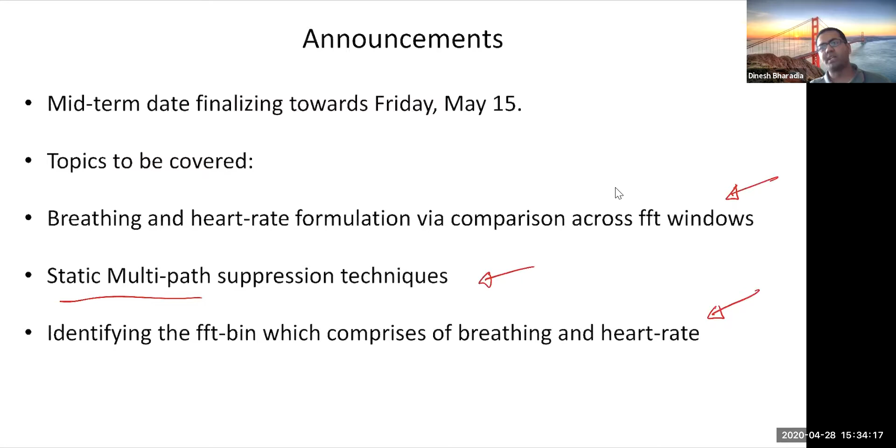I want to quickly summarize the topics we'll cover up to the midterm. This is the set of topics we want to have for sure for midterm. We'll have breathing and heart rate formulation via FFT windows. We'll show techniques to eliminate static multipath, and we'll build an idea of identifying which bin has a person versus which bin is just stationary multipath, or something changing much faster than breathing and heart rate, for example. So that's the gist of it - those topics would potentially be covered before your midterm. Dynamic multipath, we're not yet sure, just to give you context of what to expect.

So let's recap a little bit where we left off. Let's understand H of t - let me explain the architecture. You have a transmitter transmitting this FMCW waveform, x of t. That signal reflects back, comes to the receiver. You do a multiplication, mixing, then a high pass filter with a beta thresholding, where essentially you block all strong reflections with frequency less than beta, and we pass that through an ADC.

My apologies here - I don't know what happened. It should be H of t here. This is H of NTs, based on the sampling rate Fs. And then you can take FFT or some variant of FFT to understand a specific operation.

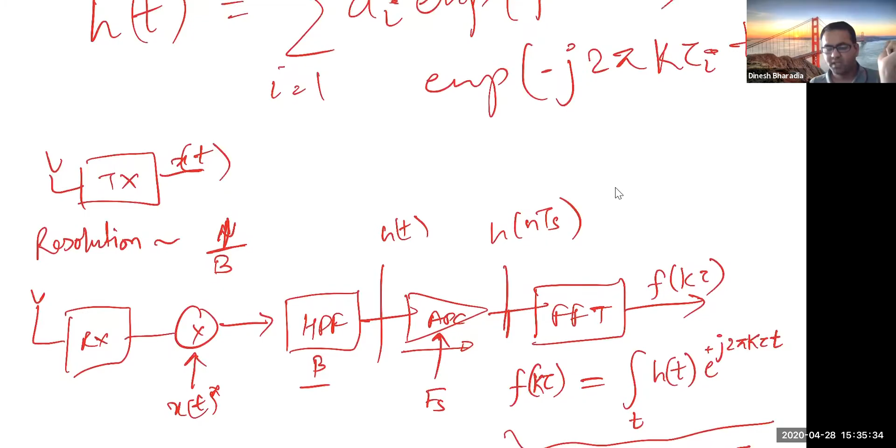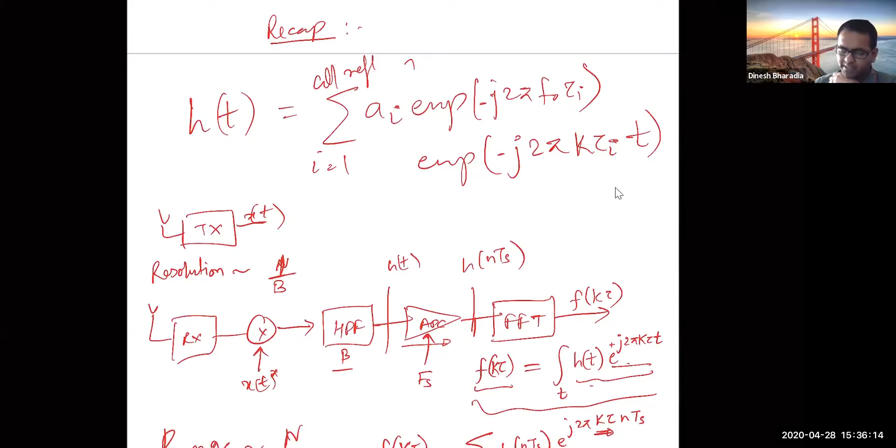Just to recap - if you take H of t times this formulation, K tau t, the expected outcome Fk tau can be written as... what can Fk tau be written as? Anyone want to take a guess first? If you do this integration of H of t - H of t is nothing but all these negative exponents. By doing this integration with a positive exponent, this positive exponent integration here, what you would end up having is this integration will lead to terms which are - anyone want to take a guess first, Keshav or anyone else?

So let's take an example. Let's plot this first quickly.

The idea is that once you take this kind of FFT, on the x-axis you have frequency of k tau, for the signals where it exists. You will get something that looks like this, with a sinc shape, a little bit like this, as we have discussed this sinc shape many times in the past.

So basically this is, let's say, a specific tau value for which a reflection falls back or comes back, and that's what you will get here. Now this f of k tau is nothing but, you can write it in some ways. Somebody want to try what this looks like?

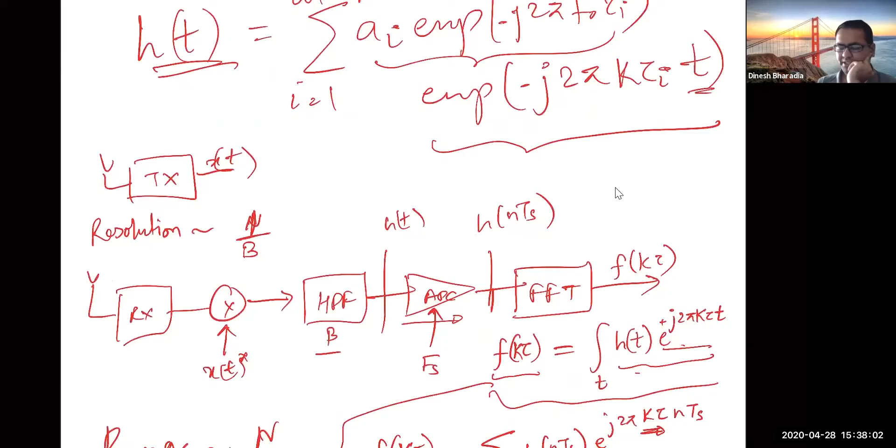So what happens to this exponent? This exponent goes away and gets replaced by a delta function or sinc function in this case. So you will get ai exponent of j2 pi f naught tau I, because it's a fixed phase component, not changing as a function of time. The only thing which is changing as a function of time will get balanced out by this integration here. Everyone following me here?

So Professor, ideally, I think I didn't follow that part. Okay, that's fine, that's a good idea. Thank you for asking that question.

So when you multiply this negative exponent here, Keshav, with the positive exponent, correct, what you will be left with is tau minus tau I, correct. Right, so whenever you do this integration, we can kind of write down this more specifically. Let me write down this integration more clearly, that way it's nicer.

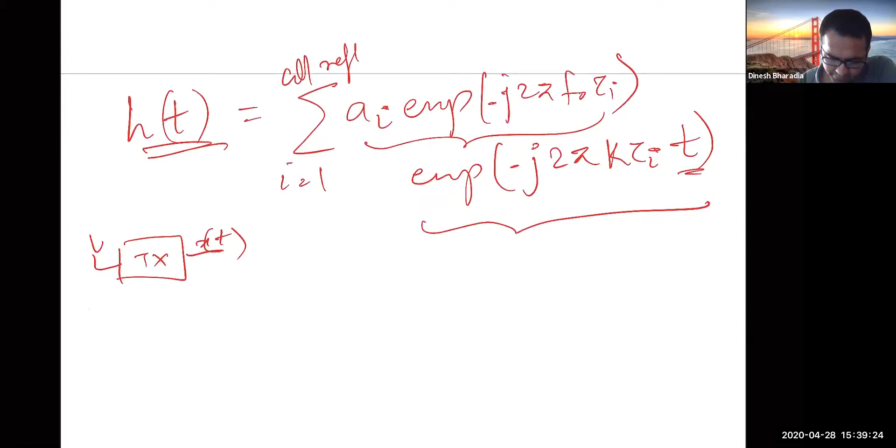Just a second. So if you think about it, this is what your h of t looks like, okay.

When you take h of t and do exponent of plus j2 pi k tau t, integration, what you essentially have is this component gets involved with this. So you have k tau minus tau I into t. I'm just substituting the h of t value into this expression here. And you will still have the ai exponent of minus j2 pi f naught tau I, but this is a constant term, so it goes out of the integration.

So what will this lead to if integrated from 0 to capital T? Let's say if it were integrated from minus infinity to plus infinity, what does this lead to? It's basically the exponential divided by 2 pi k tau minus tau I. So basically infinite integration of this leads to this one, if T were infinity, correct?

And let's say this 0 were minus infinity, in that case you will lead to this, multiplied with ai exponent of minus j2 pi f naught tau I, correct? But because we have finite time, this leads to ai exponent of minus j2 pi f naught tau I, sinc of k tau minus tau I.

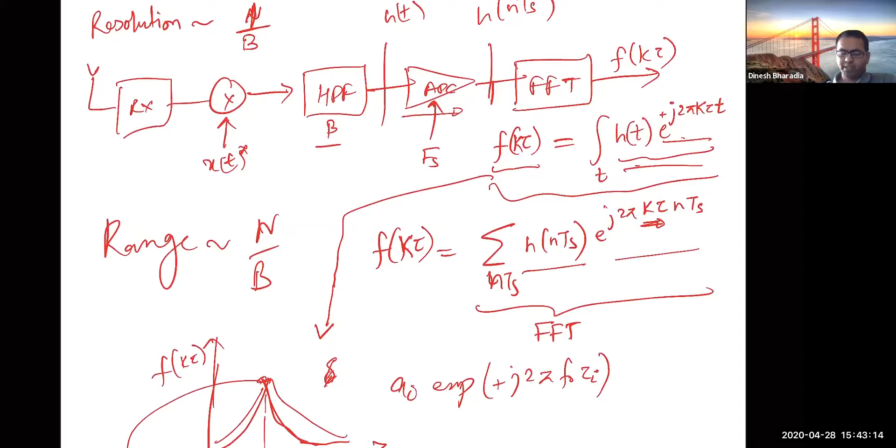So now, similarly, when you do the discrete version of this, the summation, you can first write down and start from h of nTs. So quickly, just to make sure we're following a little more rigorously here, h of nTs can be written as summation of ai exponent of j minus j2 pi f naught tau I, times exponent of minus j2 pi k tau I into nTs. You can do the same formulation and get to the same expressions which we got.

So finally what you will end up getting is something like if you take summation of h of nTs with exponent of positive j2 pi k tau nTs, this is your function f k tau, you'll end up with similar expressions as we discussed. You guys can evaluate this for yourself. But the insight really I want you to draw is the following.

This will also look like a sinc. And its amplitude, Keshav, with me on this? Yeah, I'm following. So the amplitude and all those properties will remain the same — it's just a sampled version of the same signal. The same thing will hold for this as well, and you guys can derive that.

So now let's go back to more intuitive, insightful things. So what we understood is that resolution, independent of sampling, is 1 over B for time. Correct, Keshav? Yeah. And so what it means really is that...

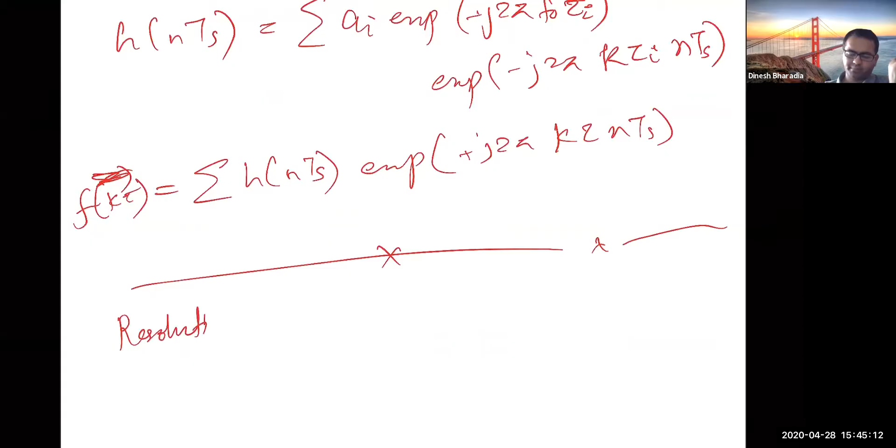Let's talk about resolution: of time is 1 over B. However, for distance, this resolution translates — it translates, Keshav, because it's 2d over c, which is proportional to 1 over B. It essentially means that distance has c over 2B as resolution.

So what resolution says is basically that if there are two reflections coming back at d1 and d2, when can we separate them? That's the question it's asking, or answering rather — separation, to be clear here.

How about range? Range, as we discussed last time — what is it proportional to, guys?

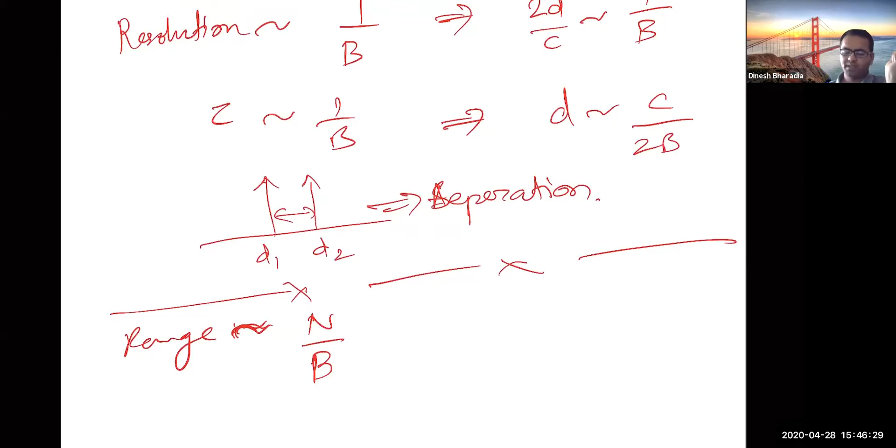N over B, right? How does this formulation come into play? The idea really here is that we take into account, as we understand, FMCW is a wave — it keeps increasing frequency over time. Let's say this is your T time, capital T. As you get more samples on this x-axis, what is your ADC doing? Your ADC is taking this received signal, which may consist of multiple signals here.

Before the ADC, you multiply this received signal with x star of T, and essentially you're trying to measure the shift. What we intuitively understood is that you essentially are trying to sample multiple wavelengths by sampling at different ADC points, correct? So as we sample at more and more points, we increase the range, as we've been discussing even with the multi-tone setup. So why does it increase the range? Let's understand that — anyone want to provide some insights?

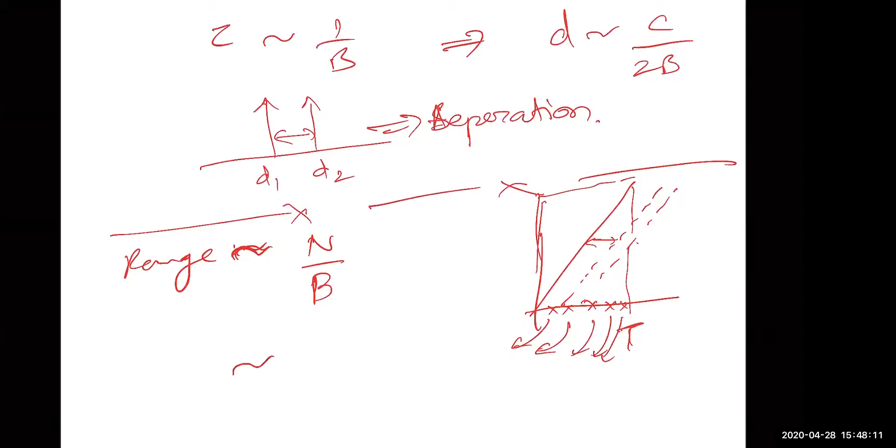Ideas, Keshav? How do we intuitively get to range? I think it's because it's related to B and then the time period we're sampling, so if you're sampling for longer, you should technically get a larger range. So you should get range equivalent to 1 over T, first of all. But again, it depends upon the number of points you sample.

Okay, so let's start with the resolution — our resolution in time is 1 over B. So one way to think about this is, I think the easy way to think about my resolution is this: how many samples do I get in each period? You can take this as T over Ts, because those are the number of samples you get in each time period — that's how much you can measure in length.

So I already know resolution, right? Which is, when can I separate these two when they can be in two different bins, okay? This is the closest distance two things can be, right? And how long can we measure? That's basically how many such separations I can create. So the way to think about it is T over TS times 1 over the resolution, right? The number of points, okay?

Does it help you guys in some ways, Keshav? Is it easy to think? Okay, how about Puneet? Is that the most intuitive way? I think, yeah, for me, it just boils down that FFT is the way to do it. Okay, but Puneet, go ahead.

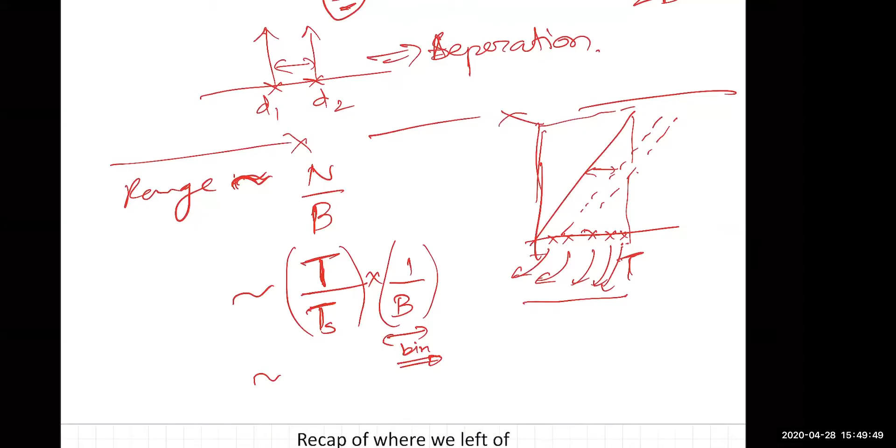Mostly, I think from the frequency bin perspective, the smaller frequency bins we have, the larger will be the range in time domain. That's about it. That is the bin, right? Bin size, basically. Yeah, right. And then basically the range is that number of bins times the range. Correct, right. So that's N over B.

Okay, right. And this leads to, now let's talk about distance, right? Distance is again 2D over C, right? N over B, right? So what it really means is that the range for D will be C over 2B times N, right? Okay. Basically, because it's two-way, the range has decreased to some extent if you think about it that way.

Okay, right. So I think briefly we understand this multi-wavelength intuition, right? Because we have been studying with one wavelength, two wavelength, and so on, right? Okay, so tell me, guys, following, right?

Does it matter in order to measure breathing and heart rate, the range and resolutions of the FMCW? Can you repeat your question, professor? Does it matter that in order to get breathing and heart rate for one person, right, these range and resolutions matter? So recall our first class, or first or second class, where we showed that even with one frequency, I can get you breathing and heart rate, right?

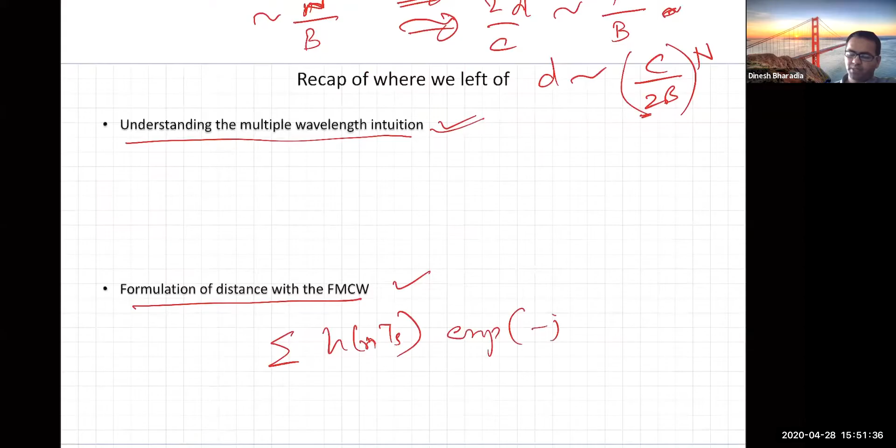Just that I need it to be super accurate, right? So what I'm trying to say is following, right? We understand this multiple wavelength, right? We understand formulation of distance, right? This is your summation of h of nts formulation, right, with exponent of plus j2 pi k tau nts, okay, right?

So I think the point I want to make is that third point here, beyond these two, is accuracy, okay, range resolution and accuracy. So even with one wavelength, you can get breathing and heart rate, okay, it just won't be robust enough. And we calculated in one of the classes that 1.5 gigahertz is the right frequency, okay, right, to capture both breathing and heart rate.

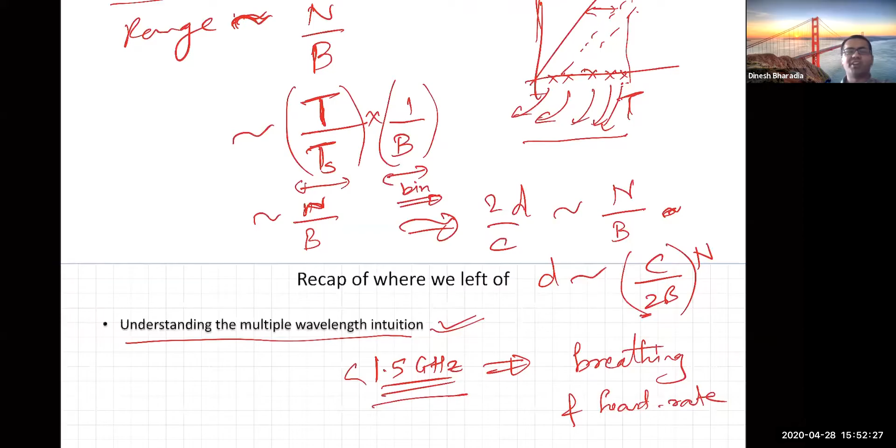That it will be done in one wave of this 1.5 gigahertz, right? Anything lower than this will be okay, right? Even above this, we said that we can make it work. We just need to do some continuity of phase, right? Okay, we'll come back and connect this dot, okay?

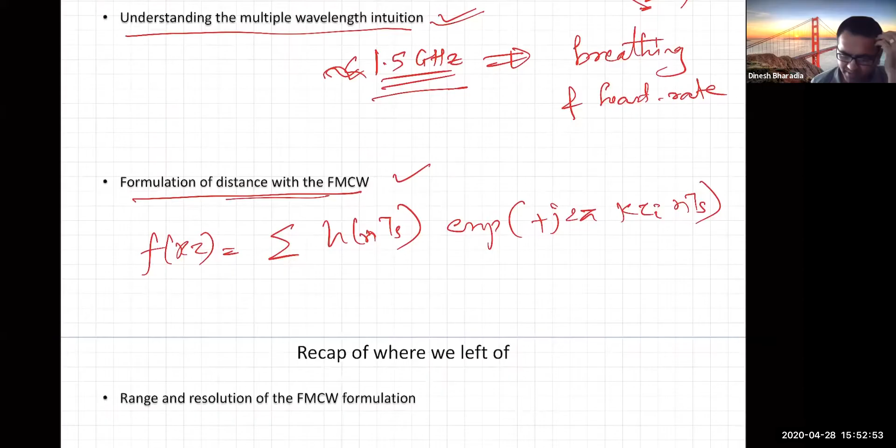So the point I'm trying to make is that these range and resolutions are good, right? But they are for a different reason. They are for making it robust, less to do with basically how you can even get breathing or heart rate, right? So that gives us the formulation of distance with FMCW. That's what we have discussed, right? And then we know range and resolution, right?

Okay, and now, finally, let me make one more point, right, which is the FFT based formulation, right, which is essentially like this formulation, right? Okay, so is this FFT first of all?

Keshav? It looks like it, right. It's actually, let's call it DTFT rather. It's DTFT, not FFT, okay. And we know because this tau version is continuous, okay, right. So that's why it's DTFT, not FFT. Okay, right, discrete time Fourier transform. And it's, you can call it inverse, but it's Fourier transform, right?

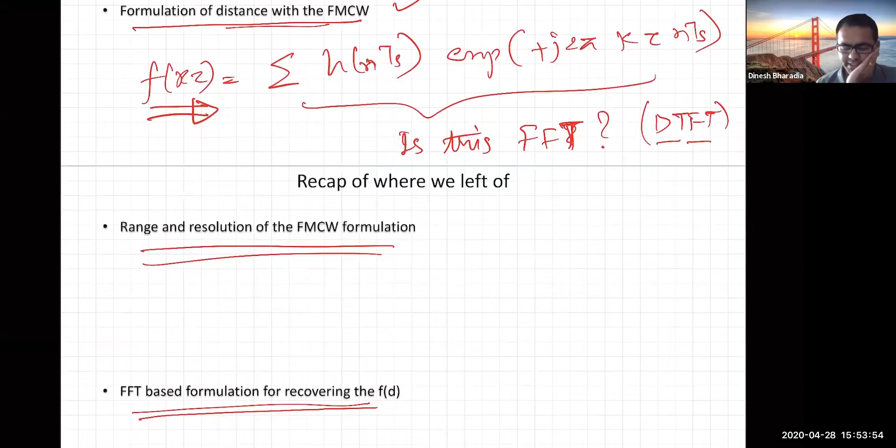Okay, so the problem with DTFT will be the following. You will measure f at k tau at some discrete points, let's say k, tau k's, okay, right? Does that make sense? Are the two Ks the same? Which case? Sorry, oh, my bad. No, my bad, let me use a different notation. Sorry, yeah, thank you for making me aware of this.

Tau m, okay, right. Now, can you tell me where this tau m goes from 0 to what value? Meanwhile, I'll complete the expression here. How about Puneet? How about you tell us what tau m goes from where to where?

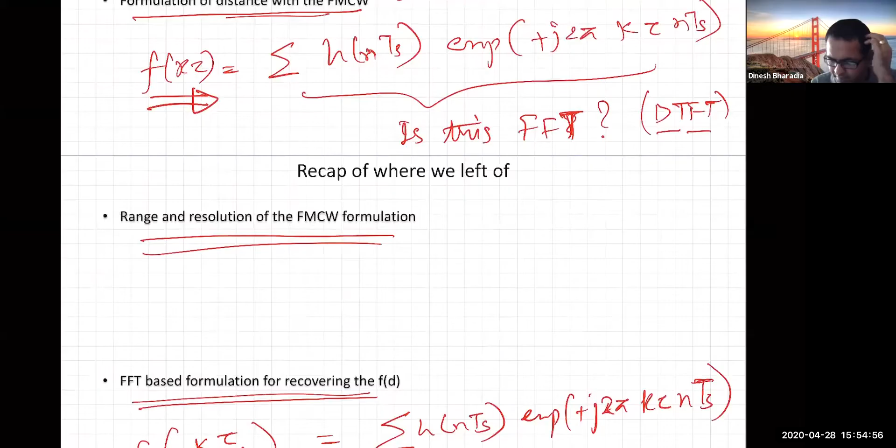Now is 2D over C? No, sorry, that doesn't make sense. It's nothing to do with 2D over C. Tau m, I'm asking where does this tau m go from, what points?

So it's essentially like taking DTFT and evaluating at a fixed number of points, right? That's FFT. FFT is like DTFT evaluated at some fixed frequencies. Call them FM here. So similarly, this FM is the frequency here if you think about it.

Let me write this down as tau m, subscript m, okay? Everyone follow?

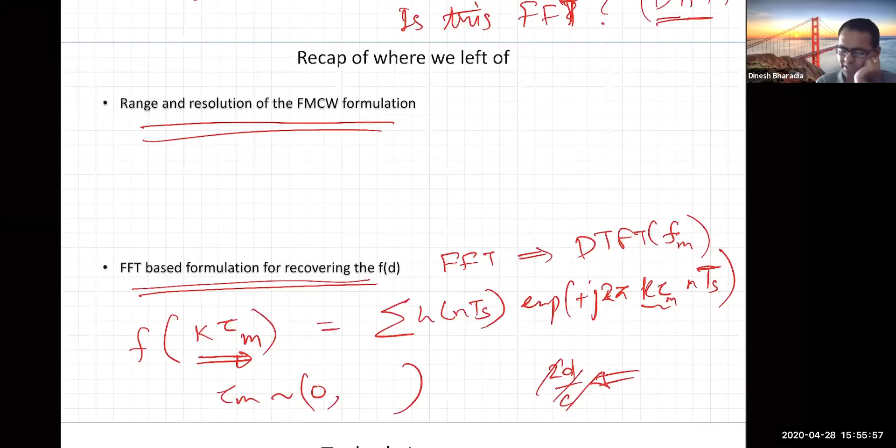Keshav, what will be the maximum value of tau m? Can anyone tell me here? Would it be T, the time period? No.

What is resolution and what is range? So what is range, Keshav? N over B, right? That is what it will be. Does this make sense to everyone?

What will be the separation between two tau m values? Puneet? 1 over B. Yep, does it make sense now, guys? Keshav, so between two bins of tau, let's say tau 1 and tau 2, the separation will be 1 over B, or not C over 2B rather, or 1 over B rather, because it's tau.

Okay, everyone with me? Yes, okay. So this generally builds the construct for you on how to think about this DTFT within discrete time with FFTs.

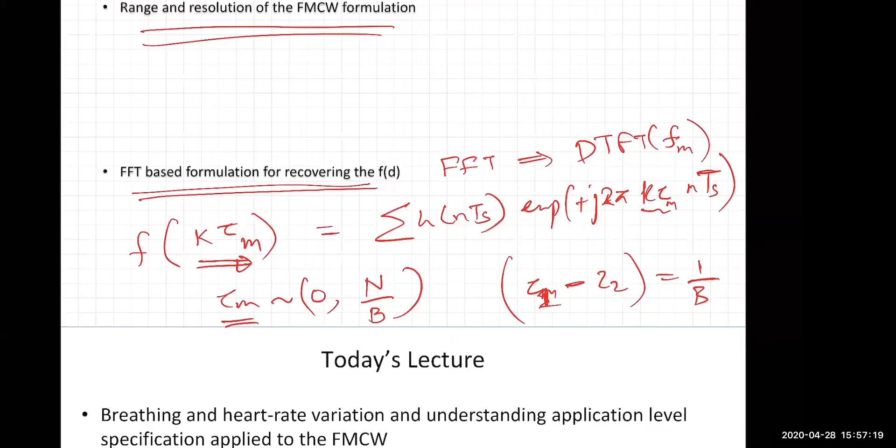So now I think what we'll do is we'll use this transform today and essentially learn how to get breathing and heart rate. And like start from the application layer again. And this is not just limited to breathing and heart rate.

You can, sorry Keshav, you had asked about T. What is T? Oh, this is for an older message or is this just now? Oh, this was me trying to answer that question. Okay, okay, yeah, good. Yeah, sorry, I was not noticing the chat so far.

Sorry, let's continue. So basically breathing and heart rate variation, right? Understanding application level specification and then boiling down to the FMCW parameters, waveform parameters, and using them to identify breathing and heart rate. And finally, one of the most important things with FMCW, which is quite overlooked, is looking at the phase information. And then I will finally connect back with some of the first few lectures we kind of have been looking at how to go about them.

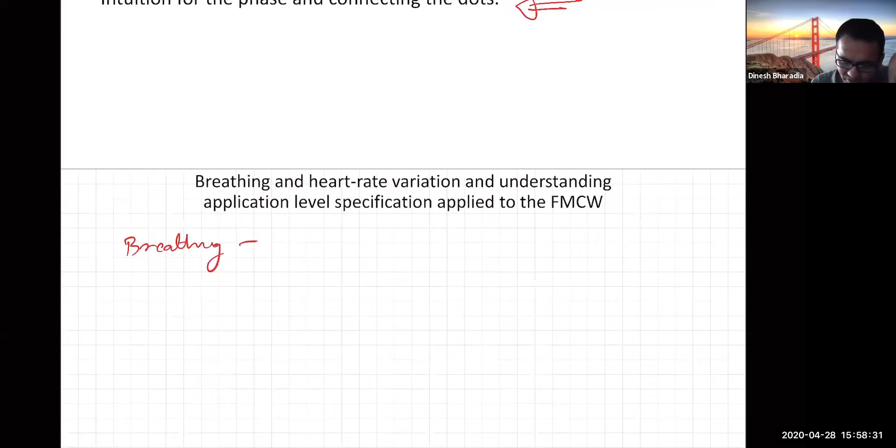So let's understand breathing and heart rate. Breathing signal, so far we have been assuming that it will be like 10 centimeters, again this is peak to peak. Is that what we have been using? Okay, and for heart rate we have been using 1 mm, correct?

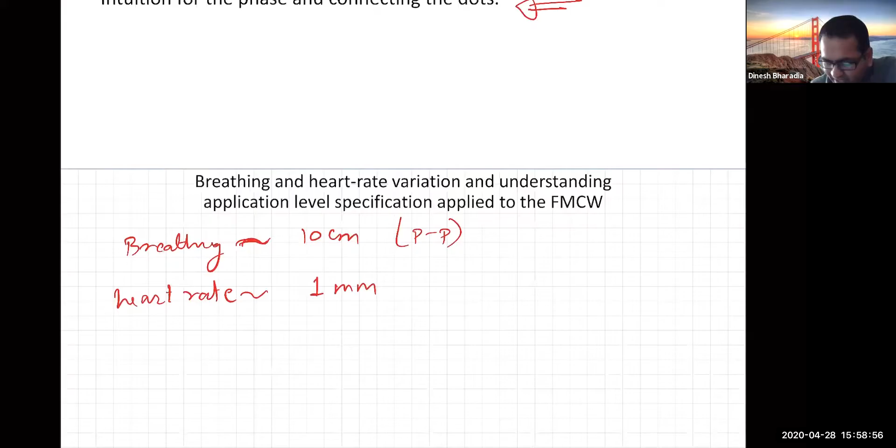I need to check these parameters, but okay, assuming that this is the parameter and the spec we are trying to design this for. So more than that, right?

What is interesting with breathing is that breathing changes with time, with what frequency? Keshav? I think it was around 0.2 to 0.4. Yeah, 0.2 hertz. Let's take 12 breaths per minute, BPM. And for heart rate it is 0.6, 0.6, yep, somewhere between 1.5.

Or let's take, what is a standard popular example you guys keep using? Come on folks, it's 0.6. Yes, what is the breaths per minute? Let's take 60 breathing per minute, okay, or beats per minute. We'll make it 1 hertz for now. I think let's keep to that example, okay.

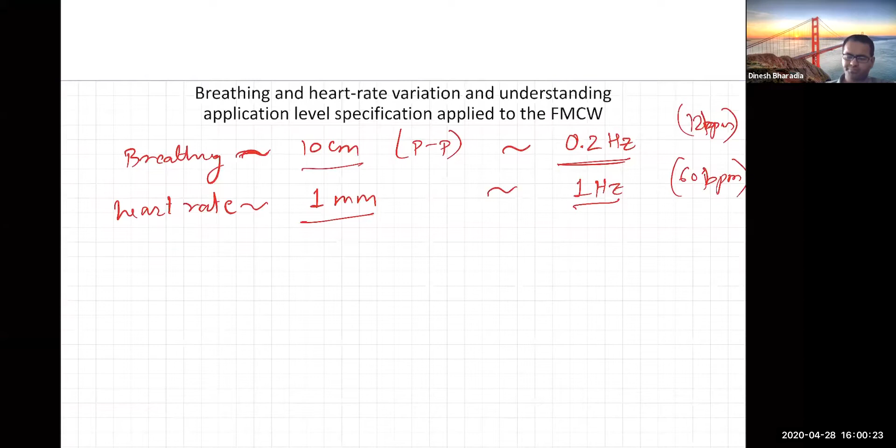So with FMCW, right? Now these are our specifications. What does this translate to? What it translates to is that D is changing with 1 hertz.

We need to at least, let's call it try to measure, the sampling rate should be at least how many samples, guys, to measure heart rate accurately for 2 hertz, right? So what I'm saying is that let's say D of T, which is your D0, plus DH times sine of this.

dB times sine of this and dH times sine of FB, FH - the frequency of breathing and frequency of heart rate, correct? So this D needs to be measured at least at 2 hertz rate, correct?

Now, with your previous way of doing FMCW, what is your sampling rate? How often do you get a D? This is one of the questions somebody also has asked on Piazza, right?

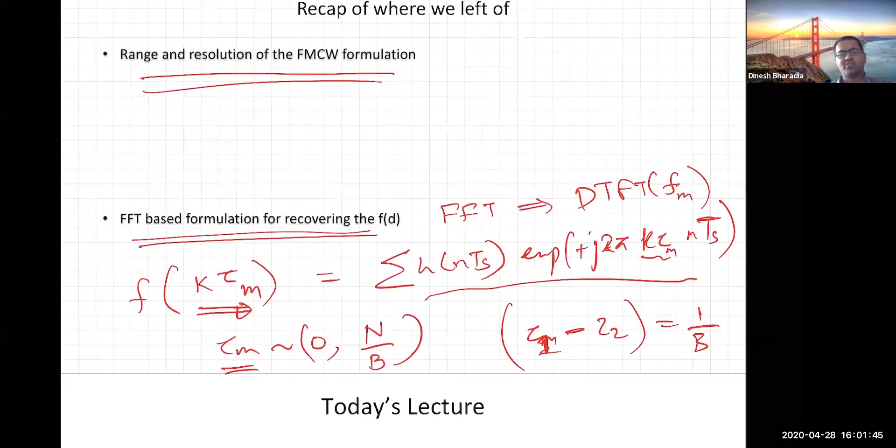So in a way, when we take this FFT, we assume for this small period of time, from the time of 0 to capital T, the environment is stationary, correct? Everyone with me on this? Yes.

Thank you, Puneet. So now, what is the rate at which we are getting samples for D? Keshav. Is it T? So you get one sample for every T seconds, right? Every T time, yeah, you get one sample.

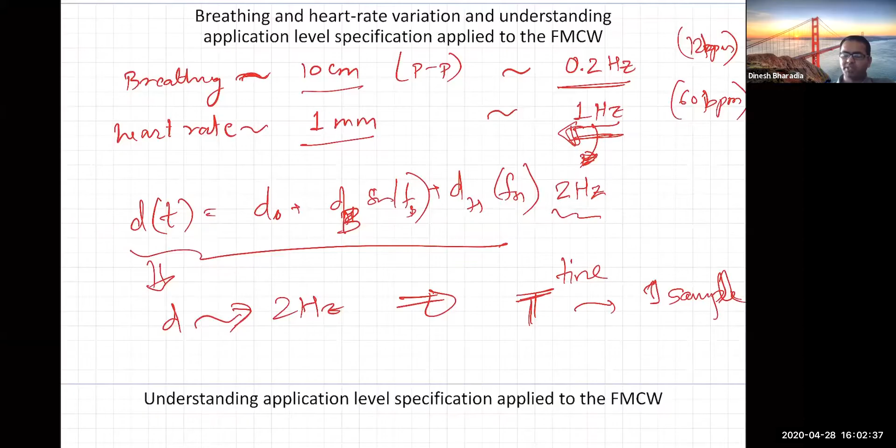And what I mean by one sample is that essentially you get one measurement of D, correct? So think of this from the following point of view. You're calculating this f of k tau - that's essentially for this entire period of 0 to capital T. I'm giving you the output of the FFT, which will look like this - giving you one strong component at this distance.

Let me write this down. So let's take an example: from 0 to capital T time, you got one f of k tau, correct. Let me just draw this as a third dimension here. For next time, from T to 2T, correct?

Let me write T here. From T to 2T, you have another similar function, which measures the distance. So each snapshot gives you a measurement of d. It's the same as your two-stage process.

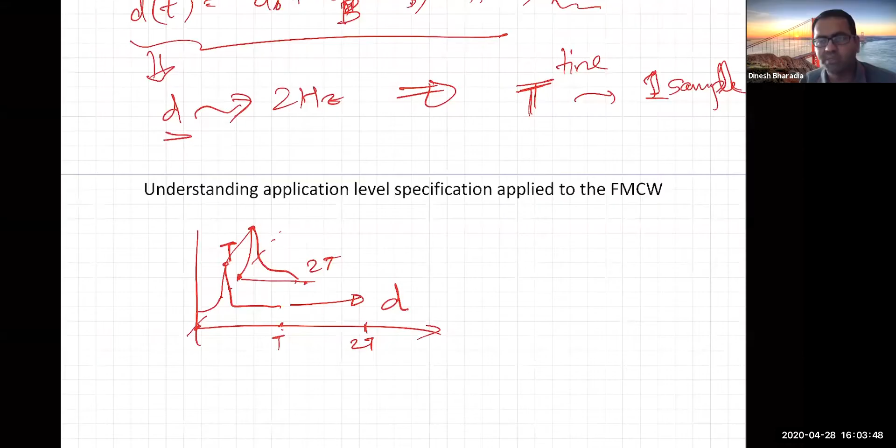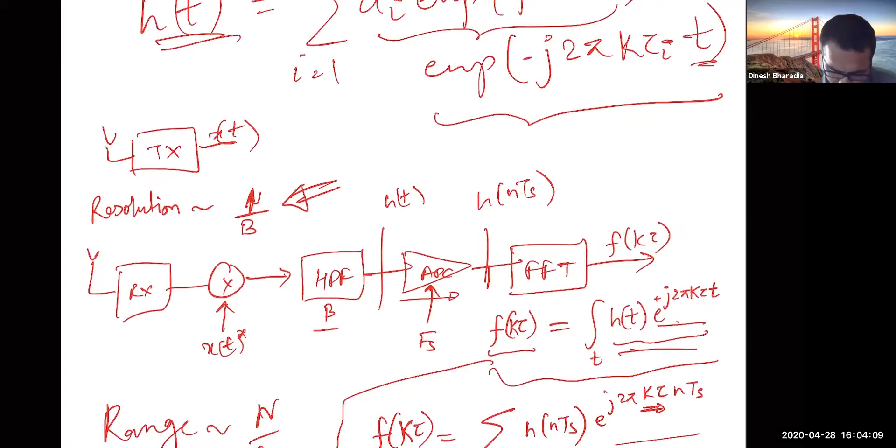So just to iterate and connect the dots back with the original thing, take a look at this architecture we have drawn earlier on. Let me just pull that architecture up quickly here and copy it over. Is it still visible?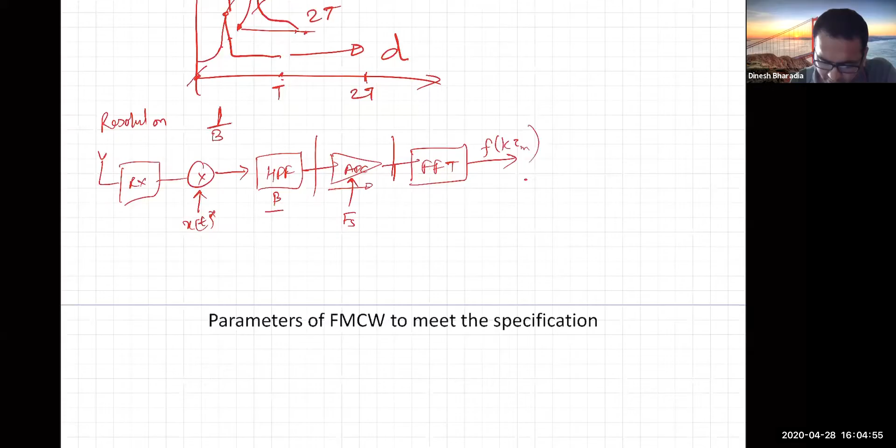I'm not going to write the mathematical expressions here, but just to give you a sense - so here you calculate f of k. What do you calculate? K tau m, right? Think of this block here as...

Professor, I have a quick question. Go ahead. So in the formulation of the summation earlier, we noted that tau m goes from 0 to n over b. But in the summation you wrote, it goes from 0 to t. Was that correct? It's still correct.

Let me explain. I think it's a matter of, in this case, n times ts needs to start from 0 and it goes all the way up to T. What is T? When you take it, it's equal to capital N, correct? T over TS is nothing but capital N. So you can say this summation goes from 0 to N, for example. Is that the question?

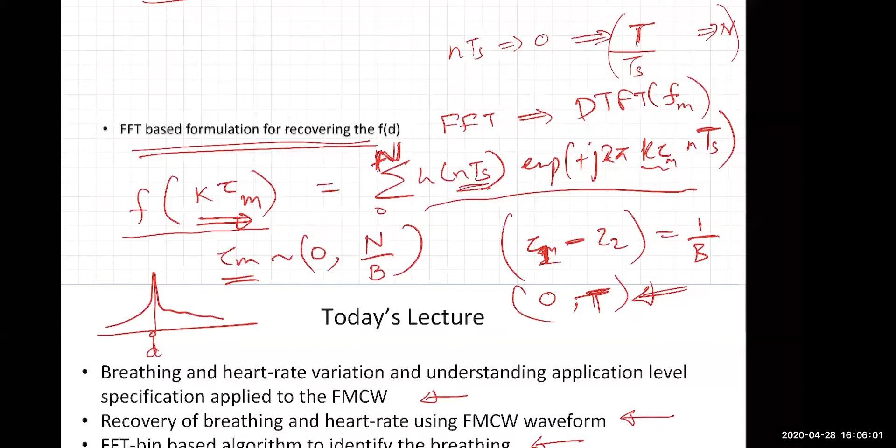I'm still a little bit confused as to why it goes - confused with the expression. Let me... why don't you tell me the same expression that we were talking about just now. So aren't we summing over all tau m?

No, we are summing over - oh sorry, that's a good question, thank you for asking this. We are summing over n here, guys. If everyone is not clear, look - it's the time index on which we are summing or integrating. Think of this: this is your equivalent of time index, T equals to N times TS. It's summed over time, guys, not summed over n comma t - depending upon the notation.

For example, for this integration here we talked about in the continuous time - it's summed here for what, Keshav? T, from 0 to capital T. The same thing in digital domain basically becomes this summation here, for example, goes for some n equals 0 to capital N.

Does that make sense now? Yeah, that makes sense now. Thank you for asking these questions. I think these are good questions, keep asking them whenever you feel like it's not clear.

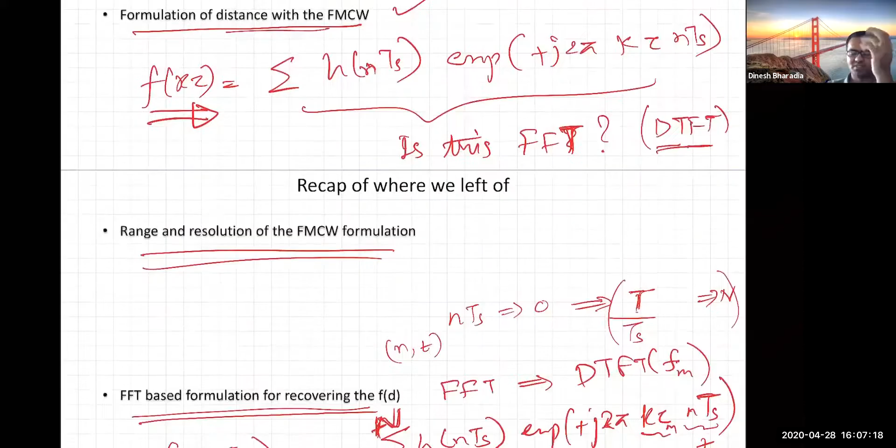So now you understand this three-dimensional notation, right Keshav, and everyone else here? I have a doubt - similar to multitone, when we take one time period, we'll get a sinc function, find the dominant path, and do it for multiple time instances. But I see the resolution for distances will be pretty bad, because I calculated for 1.5 gigahertz it will be 1 by B, right, so it will come around in meters. So we will not see a change across time in the distance variation - it will be the same bin where we'll see the peak always.

That's a good point. In the 1.5 gigahertz case, definitely that's true, and that's not the way to analyze it. This is where you need to step away from resolution - as I made the point earlier, to measure breathing and heart rate you don't need any range or resolution. You only need accuracy, because you can track the phase as it changes.

So for example, here as well - what is the phase here, by the way? The phase is proportional to A tau, right? What is A tau? Exponent of J 2 pi F naught tau i.

So what I'm trying to say, Puneet, is the following: the peak won't change, but its phase will change, for your one tone. In this case, for breathing, the peak will change, and for heart rate, the peak won't change. We'll go over this slowly in today's class and hopefully that will clarify it for you.

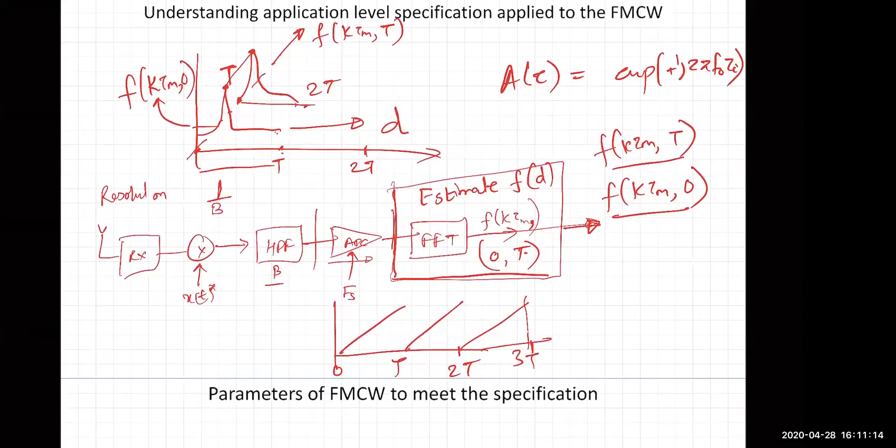The second stage of the process is to take - we do the estimate for multiple chirps. I think we've already explained that f of k tau m comma T is one for each chirp, right? Yes, you're correct, we'll now analyze it for multiple chirps.

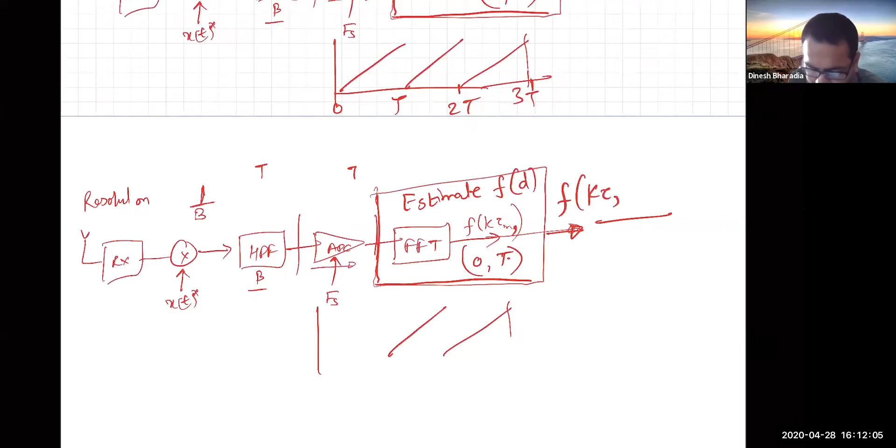So just to clear and complete this thought process, I'm going to copy this. So now this f of k tau - how can I write this now? Let me write some notation: f of k tau, comma, capital N times t, okay, or let me write it as m - no, m I already used. Let's call it L, we can use L - Doppler is L for me always. So it's L times capital T, correct? This is fed into the second part of the process.

And this second part of the process, by the way, guys, right? So this is essentially generating one for each chirp. F k tau LT is like for one chirp each, or let's call it the Lth chirp. Does everyone understand by chirp, I mean this FMCW transmission and the entire process of FFT, okay?

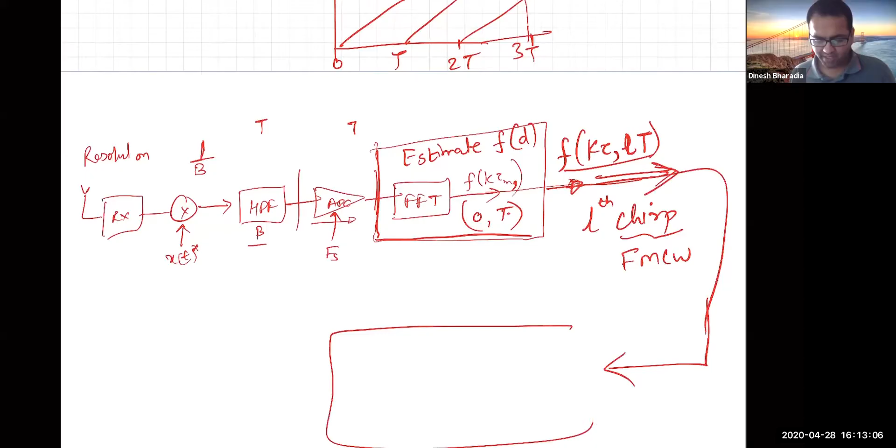So this signal then is fed into, what is it fed into? Measure breathing and heart rate here, okay. Or what we call here is more like analyze time series, like we have been calling this previously.

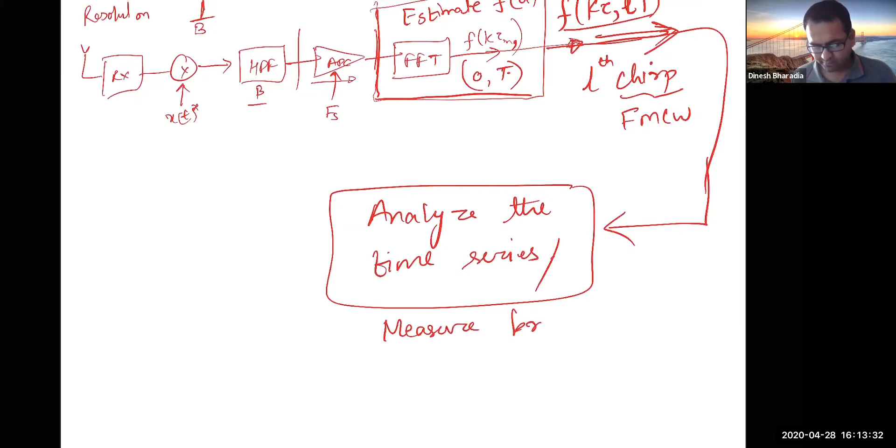Now, is this clear, the process, right? At a high level, the process is clear. Now, how do we go about this process is a more important and interesting question, right? Puneet, make sense? Yeah. Keshav?

Yeah, okay. So one trick will be like, as we discussed, we'll just monitor what happens. Let me just explain here, let me highlight. Let's see, for example, I analyze. Can you see the highlight here? I guess yellow color is not visible, or let's do orange. Okay, so we'll essentially use these times and their peaks and see the peak shift, for example.

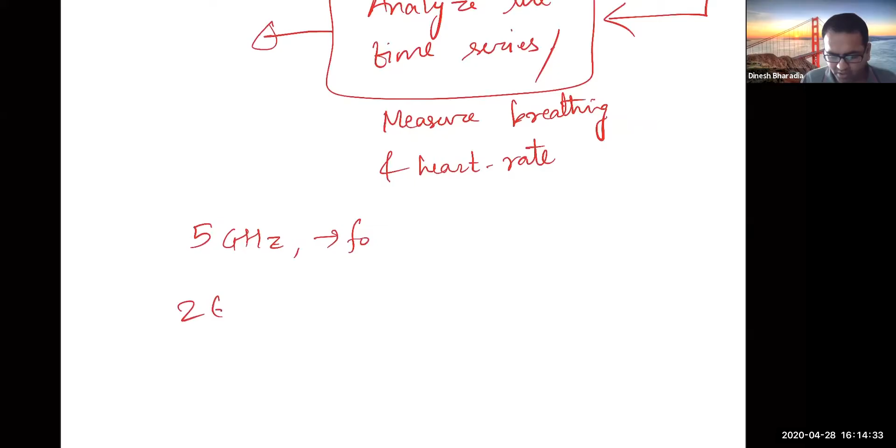So let's take an example from our previous parameters. In the last class, we defined a radar which had 5 gigahertz as F naught, 2 gigahertz of B. I don't think we need anything other than this. And this will give us resolution of D, which is C over 2B, which essentially comes down to 7.5 centimeters, correct?

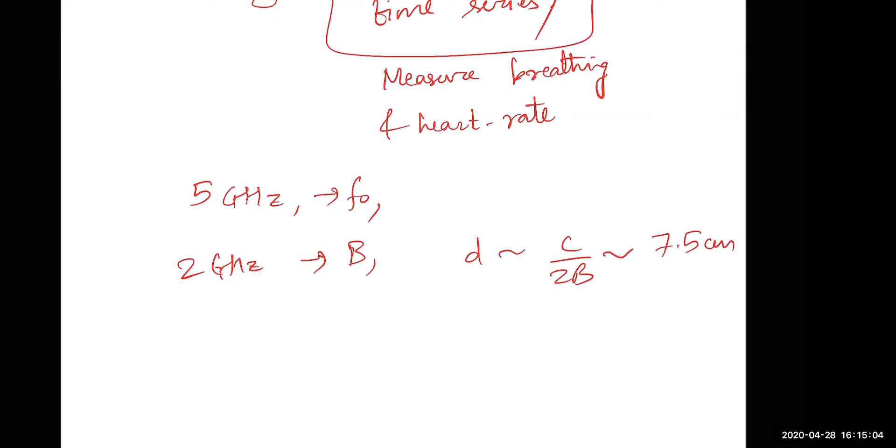Professor, aren't you multiplying that by n? No, this is resolution, what do you mean by resolution? Oh, resolution? Sorry, yeah. So, and what was capital T in last class? I think we took it as 100 nanosecond or something like that.

So now think about what is the sampling rate at this point, guys. The sampling rate at this point is T, right? You get one sample every time T. Correct, Keshav? Yeah. So in a time series, if I get one sample at time T, every next sample comes after time T.

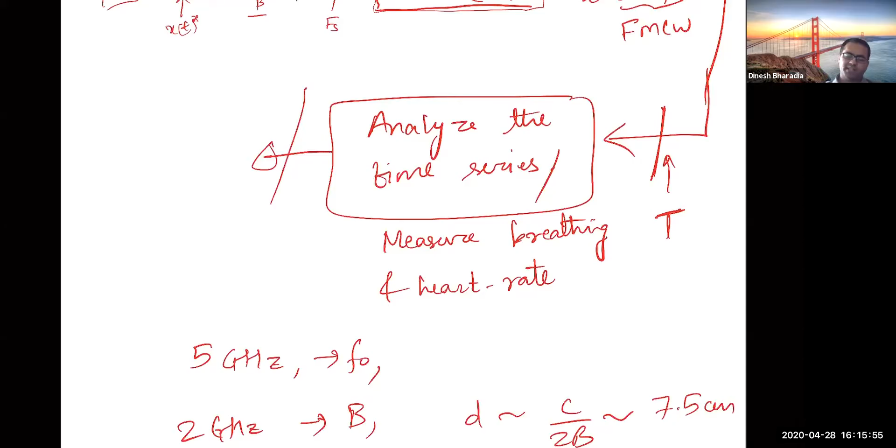So let's start from this part. What is the process we are trying to measure? We are trying to measure 1 hertz heart rate here, with amplitude of 1 mm, and 10 centimeter with 0.2 hertz breathing rate. What are the implications of these two processes on this side?

So let's start with the frequency implication. The frequency implication is that this T should be at least 2 hertz. Okay, let's say more like it's because it's time. Let me erase this a little bit. Let me call it 1 over T should be greater than 2 hertz. Does that make sense, Keshav?

Yeah. Now, similarly, this 1 mm and 10 centimeter, how can we derive some insights from this? So let's understand what is the bin width here, meaning when I take f of k tau m, how much is each bin separated from the other bin?

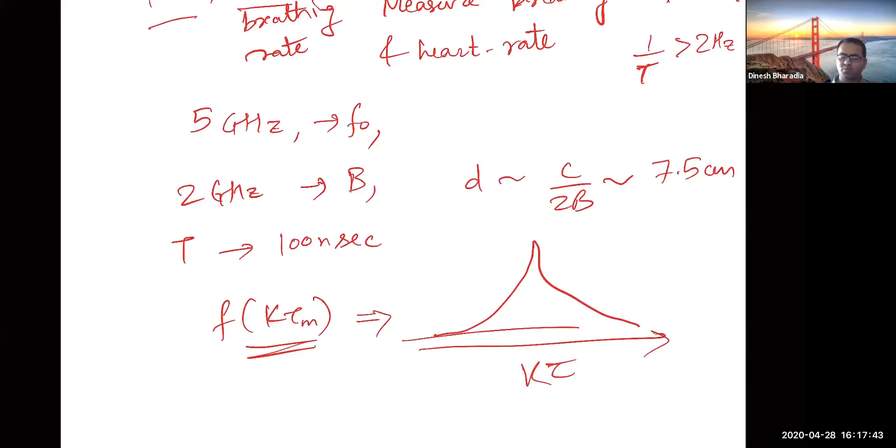So basically, when you do f of k tau m, it will be like a bunch of these discrete signals with x-axis as tau, k tau. And let me just draw maybe more like a sinc function. Yeah, it doesn't look like sinc, but it is sinc, let's say. Let me redraw, let's say this is your sinc. I get one sample here, one sample here, different k tau m's, right? Does that make sense, Keshav?

Yeah. So now, basically, with breathing, because this bin width is 7.5 centimeters, what would happen really here is that when you try to process this data, let's take an example that this is your f of k tau m at time instance 0. Let's say you see a peak here at this bin, and let's say it's the highest peak. In the next time instance, you'll see the same peak here somewhere. But at some point, let's see what is that point. So let's say your breathing is 0.2 hertz, what it means is that this is your D axis as well. So because breathing is changing slowly, you'll see some kind of a sinusoid pattern here.

Does that make sense? Between this D? Yeah, it's because you have different chirps, right? Yes. At different chirps, your D will change slowly, right?

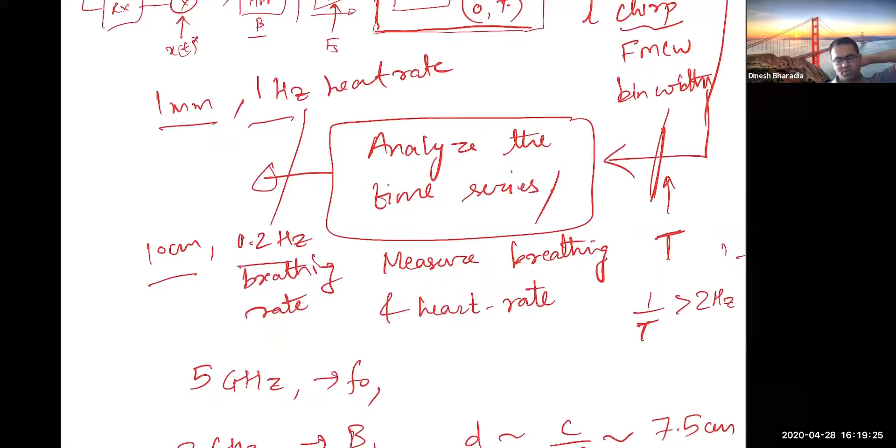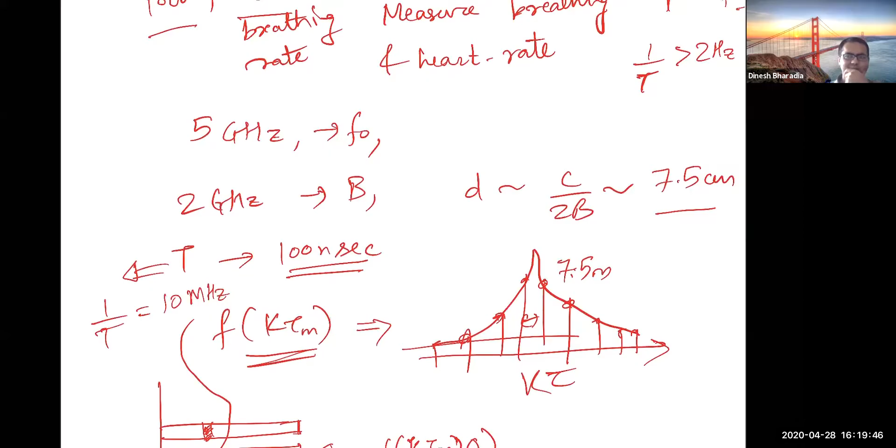Okay, but just to give you a sense, right? Because we are doing every capital T as 100 nanoseconds, right? So you're getting how many samples? What is your sampling rate here? 1 over T will become more like 10 megahertz. Correct, which is a whole lot more. But the idea really is that this distance D will change after 10 million samples, right?

Okay, is everyone following me here? Yes. Professor, but that distance bin of 7.5 centimeters, isn't that a little bit too large for...

I think this is for heartbeat. No, 7.5 meter... sorry, breathing, right? Let me just quickly correct a few things on the slide. This is centimeters. Sorry, for breathing we need 10 centimeters, right? So you guys understand that we can get breathing, right? But we don't know how to get heart rate now.

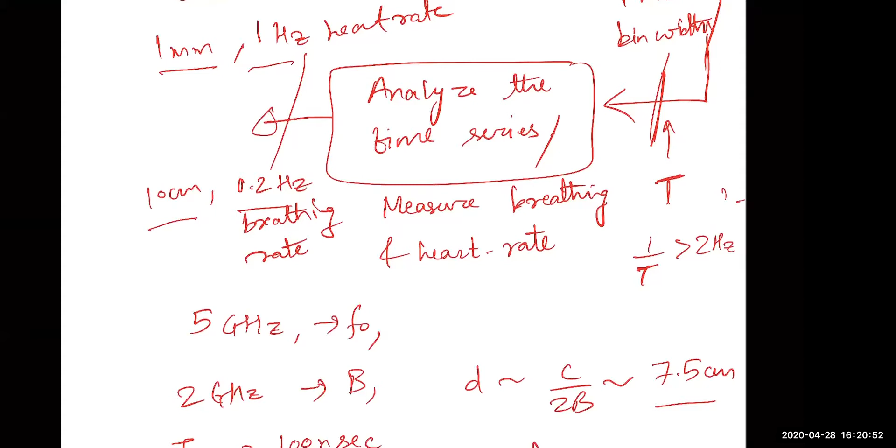That was my question - isn't that too large for heart rate binning? Yes, for heart rate you cannot separate the bins, right? Does that make sense to Puneet as well? Yes.

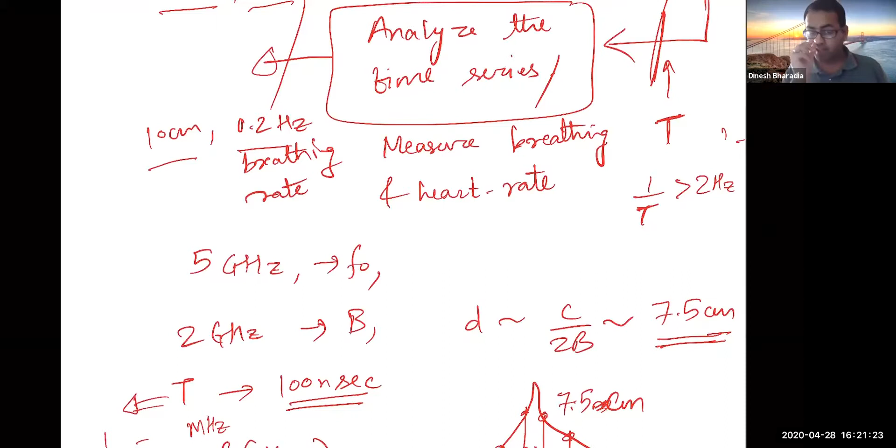I mean, is this still too large for breathing? Which plot? I mean 7.5 centimeters. Yes yes yes, just changing between two bins, or three bins at most. Yes, exactly, so even for breathing there are not many levels. Is that what you're saying, Renji? Yeah, so even for breathing you don't have that many levels as such.

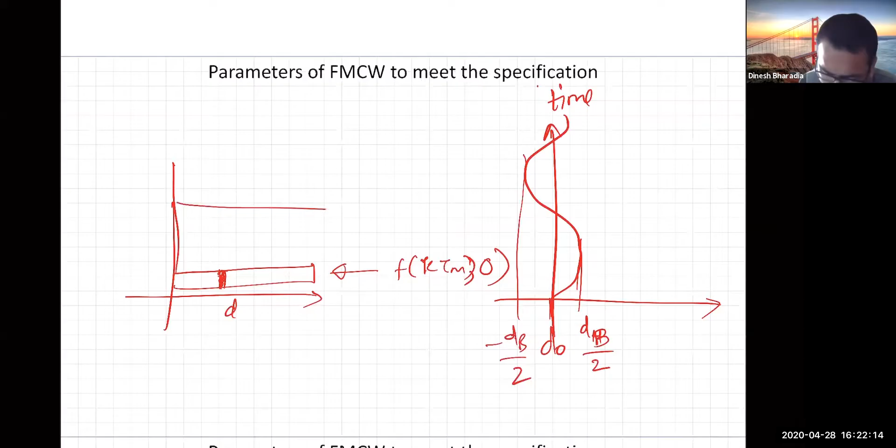Okay, let me erase this a little bit, and let's draw distance first, here on the right side. I'm going to draw distance here, let me explain. On the y-axis I have time here, and breathing changes here. So this is your D naught. Let's call this D breathing by 2, and this is D minus breathing by 2. Let's say this time here is 2.5 seconds, just because breathing is 0.2 hertz, let's say.

So what would happen really, guys, is the following. In this entire 2.5 seconds, when you look at this f of tau here, it will maybe shift by one bin. Not even one bin - but let's say that's basically the maximum shift you will see. Does that make sense?

Yes. Sorry, I kind of have turned up the zoom weirdly. I don't think you guys can see it. Okay, yeah, sorry.

Yeah, next, I think when you go back to this 5-second time point here, right, then this maybe will go back to the original bin. So you'll barely see a fluctuation between like 2 bins. So how do you measure with just small fluctuation between these 2 bins? Does that make sense, Ranji, Keshav?

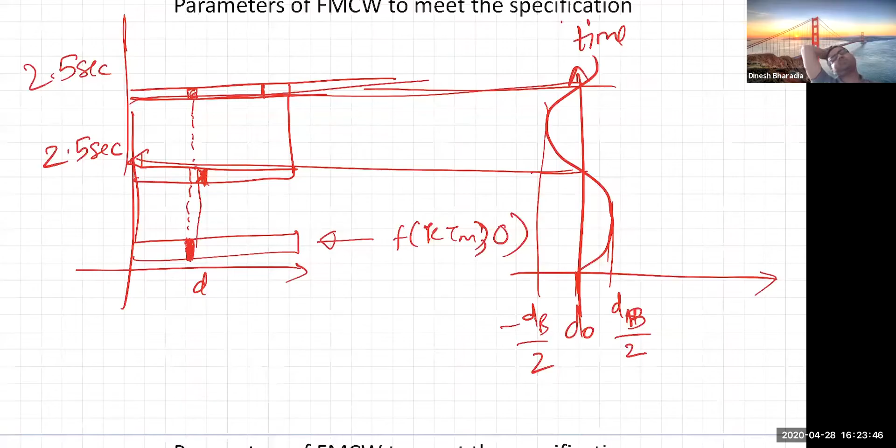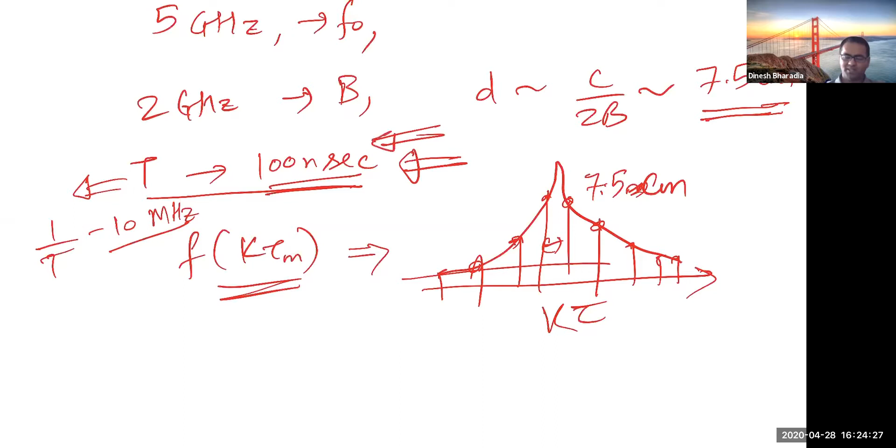Yeah. How about you guys give me a crude algorithm? So now we understand the overall problem statement. Let me summarize a few things. Capital T - here we have, this is more than sufficient, this is like your 10 megahertz. What you really need is just something as slow as a few hertz - or more specifically, 2 hertz is sufficient, 2 to 3 hertz is sufficient. That's number one. So this is a super over-specified parameter, but bandwidth is super under-specified.

Correct? Or it looks like it is super under-specified. Sorry guys, I think I just got a warning that my laptop is running out of battery. Give me a second, I'll get my charger.

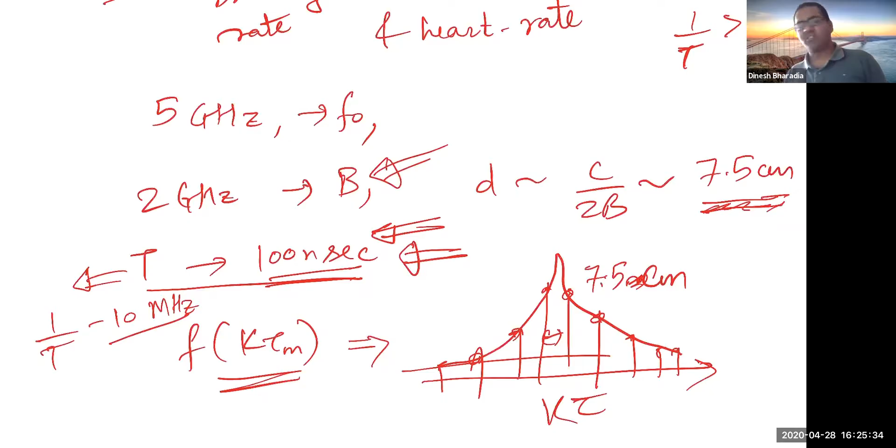Sorry, yeah. So bandwidth is very little because it gives you 7.5 centimeter resolution. Would have loved to have some millimeter resolution. Now I think what I'm going to show you today is that these parameters, which may look insufficient, are actually sufficient - that's the objective function I have next. So we understand that the FFT-based technique is a little bit flawed because of its binning. What is the fundamental flaw? Can someone tell me what is the flaw with the... go ahead, somebody want to tell me the flaw in our algorithm right now? Keshav?

So if I were to draw the time domain diagram here as output of this, what I will see is D is like 1, and it's going to be in one bin for majority of time, then goes into the other bin and comes back. So just to give you an example, it goes to this, comes to this bin. And this maintains in this bin and then goes back to this bin. So essentially you'll see some kind of a square wave, if you may. Everyone following this?

Yeah, actually, we are seeing which bin we are in, so it's a square wave. Okay, so the problem is we are not seeing this continuous wave, we are seeing a square wave. That is the problem. How do we make this square wave into more continuous wave? Does that make sense?

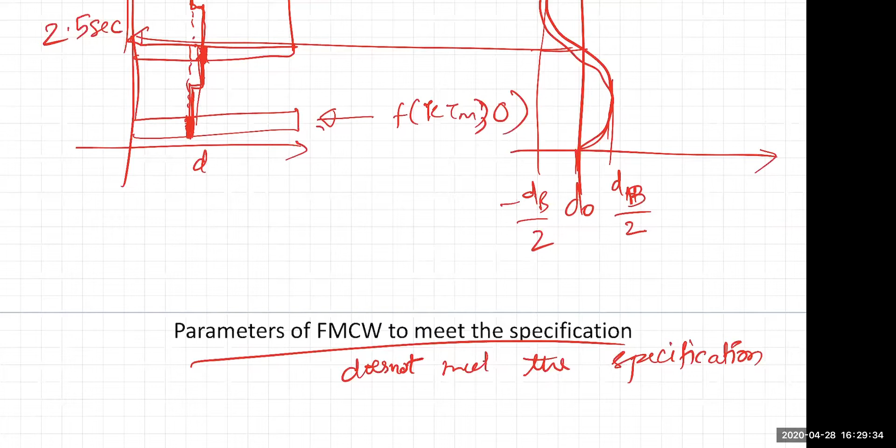Professor, I don't think we're seeing anything. Oh, sorry, it is. Thank you for informing me. I have to reshare.

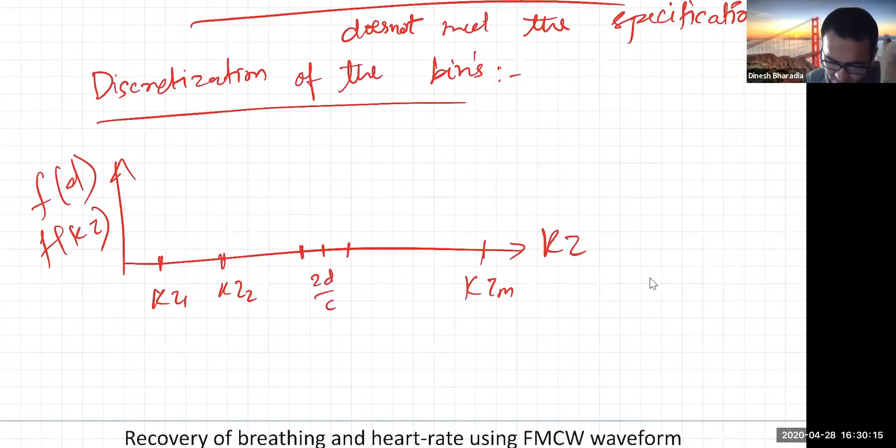Can you see it now? So x-axis is really tau here, K tau, and this is your output of your FFT. And let's say the actual underlying 2D over C falls between two taus, K tau K and K tau, K plus 1.

So this is your underlying reflection. What would happen is that because it creates a sinc shape, as we have discussed, you'll get some kind of this as your sinc. This is, I'm plotting the amplitude here, so you'll get some kind of this behavior. Ideally, you would like to reconstruct this point. Can we reconstruct this point, guys?

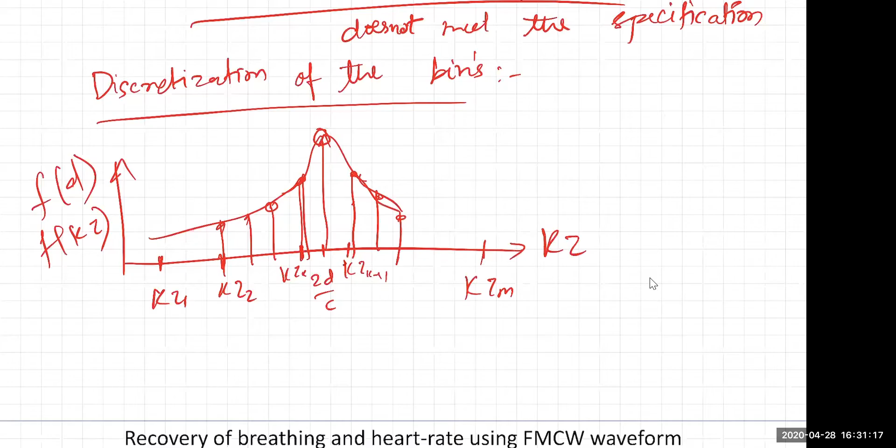I think somebody from Renji, maybe from your end, there is some noise coming. If you can mute yourself, that would help. Oh, yeah, sorry. So, yeah, what was I saying?

How can I make it more continuous instead of discretization of the bin? Ideas? Puneet, Keshav? Think, guys, think.

So the idea really here is that first, you identify that there is a square pattern whose frequency is somewhere between less than 1 hertz, 1 to 2 hertz. Identify those bins, or the areas of those bins. Next thing, what would you do if you were given this problem to solve? Let's think from first principles.

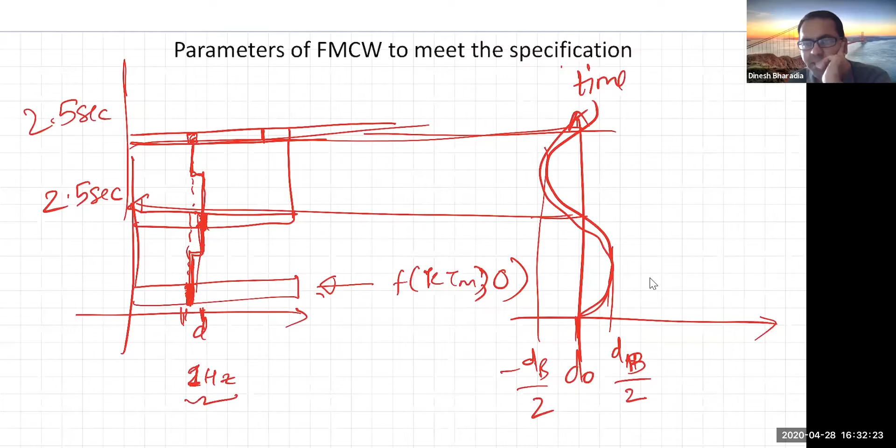So why did I introduce FFT, Keshav? It's just because it's simple to compute. Instead, can I do DTFT or can I do an FFT where I have more points here instead of the number of points which are fixed? What if I have more points here on this axis? Wouldn't that make my job simpler?

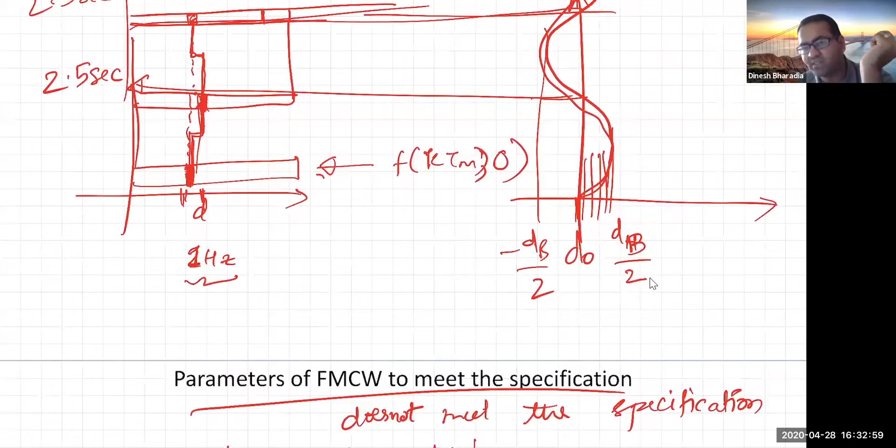As in, I would not get the square waveform. I would get more levels in this waveform, because I can measure this distance more finely, correct? Does that make sense to everyone? The idea here? Keshav, Puneet?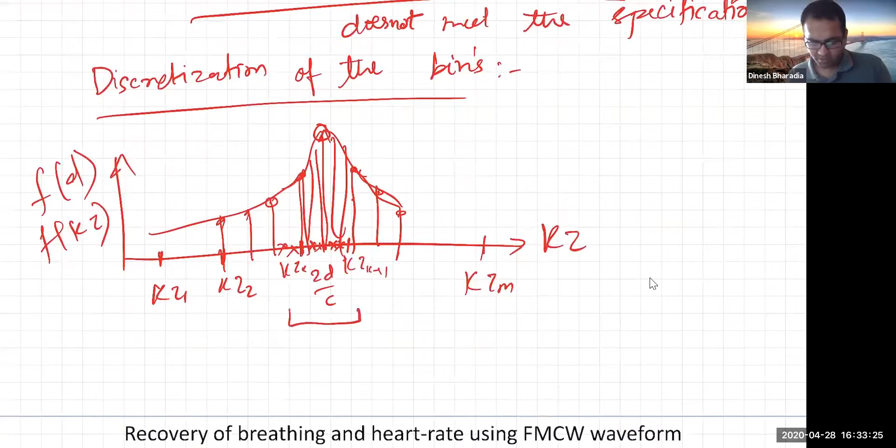We are trying to increase the resolution in the distance domain. The idea is that we narrow down to a zone of distance, and within that distance we compute f of k tau more finely. So you take from tau k to tau k plus 1, and you can compute more points.

So this is kind of an off-books algorithm, and not a lot of people use this algorithm. But it will give you much more accurate breathing measurements. You essentially take this window of tau k and tau k plus 1, and maybe split it into, let's say, another 40 levels.

So you have k tau k plus delta, and so on and so forth, all the way up to k tau k plus 1. Now delta can be such that these number of points are, let's say, some capital M, or maybe capital R. This is super resolution in some ways, R for resolution here.

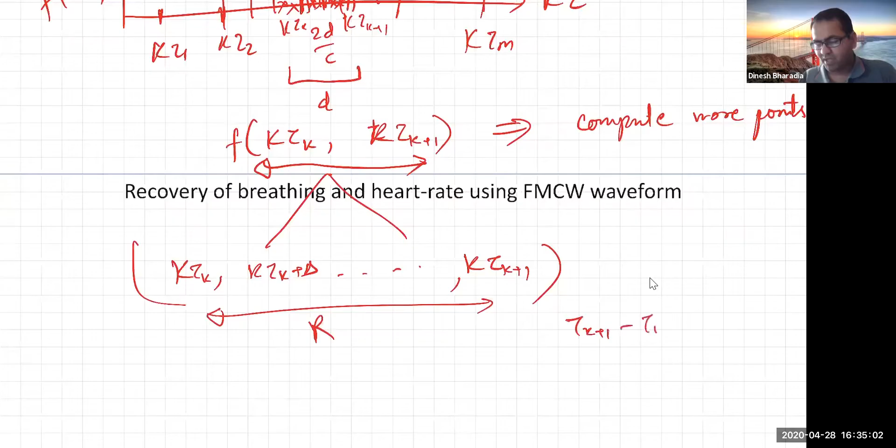So in a way you're kind of doing super resolution, guys. It's just a very simple technique, but it does some kind of super resolution algorithm here. So essentially you take tau k plus 1 minus tau k, divided by R, as delta, and you compute this new value.

Now to compute f of k tau, we know how to compute that using h of n ts, for let's say k tau, or any k tau k plus delta. The formulation here: we have exponent of minus j 2 pi k tau n ts, summed over n from 0 to capital N.

So does this at least give you a hunch that with this technique maybe we can do slightly better for breathing? Puneet asked: theoretically we can do it, but how will we get these measurements? There are no new measurements - I'm just computing the same measurements of h n ts, but with more fine-grained f k tau.

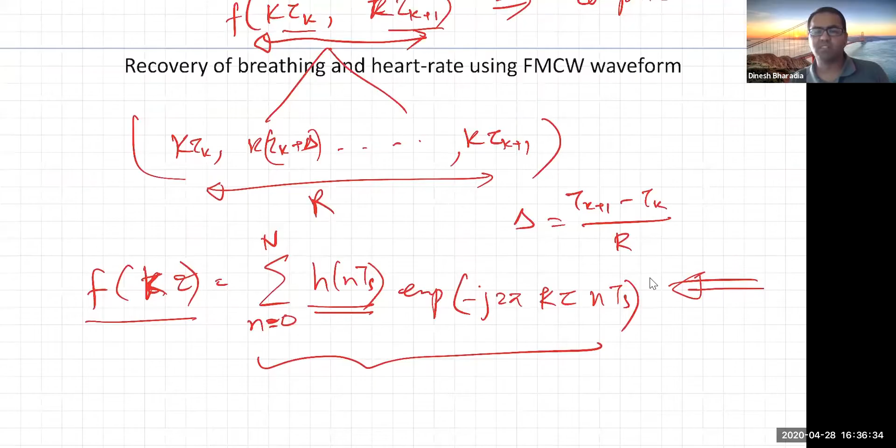A student asked what R is. R is nothing but just the number of points here. I'm just taking the window of tau k and tau k plus 1 and making it more fine-grained. Instead of 2 levels, I have many more levels now, like shown in this figure. There will be now R levels instead of just 2 levels.

I don't think that still answers Puneet's question - like how are we getting these? Let me try to make a difference clear here. Resolution is more to do with how to separate two signals or two reflections. But if one reflection is changing with time, that's nothing to do with resolution, guys. So that's the fundamental point I'm trying to make.

Resolution is about separating two signals concurrently. What we are doing here is we have one reflection which is changing with time. So this is where resolution doesn't apply.

When will resolution apply, Keshav? Resolution will apply when you have signals coming from, for example, two people in an environment - one is Keshav, one is Puneet. Then resolution applies: which signal is Puneet's, which signal is Keshav's. But if it's only Keshav's signal coming back, and it's changing slowly over time, and I'm trying to measure that slowly changing process over time, then resolution doesn't apply.

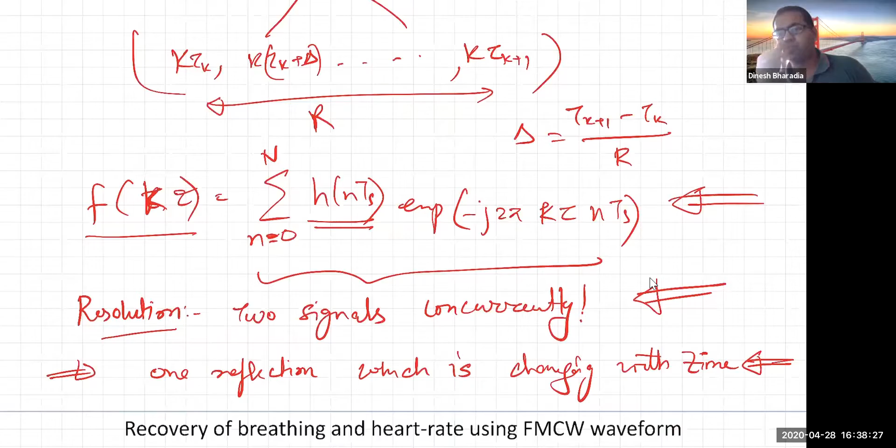You tried unmuting yourself. I was wondering if you have a question. And Keshav, even if you have... it got disconnected and reconnected again. Oh wow, you got disconnected at a crucial time.

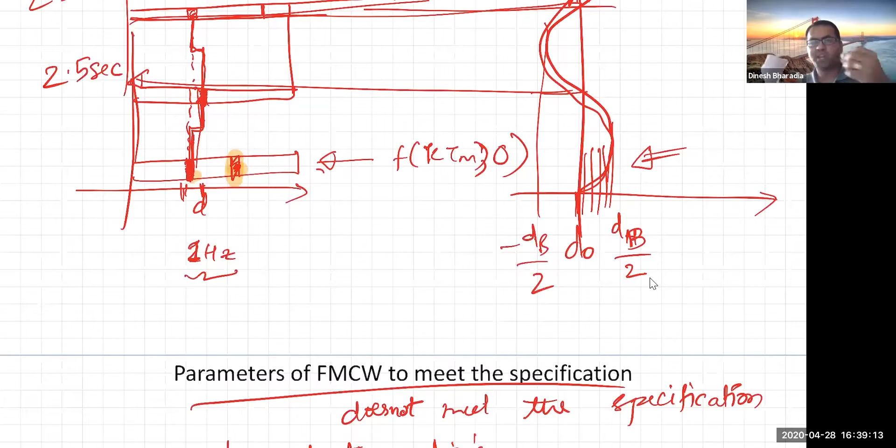So Keshav, are you saying that in that square diagram plot you drew, there's a small variation where it's drifting to the right and left? Like it's not exact same place of the bin? Yes. So I think what I'm saying is that for resolution to matter, if there was another reflection coming at this point, let me highlight this point - whether you can understand both their movements over time or not, that's where resolution matters.

Keshav, Puneet, does this clarify things for you? So this part of the process is more to do with accuracy and less to do with resolution or range for that matter. Puneet, make sense? Yeah, like calculation wise, it makes sense. I'm just thinking how it will actually do it.

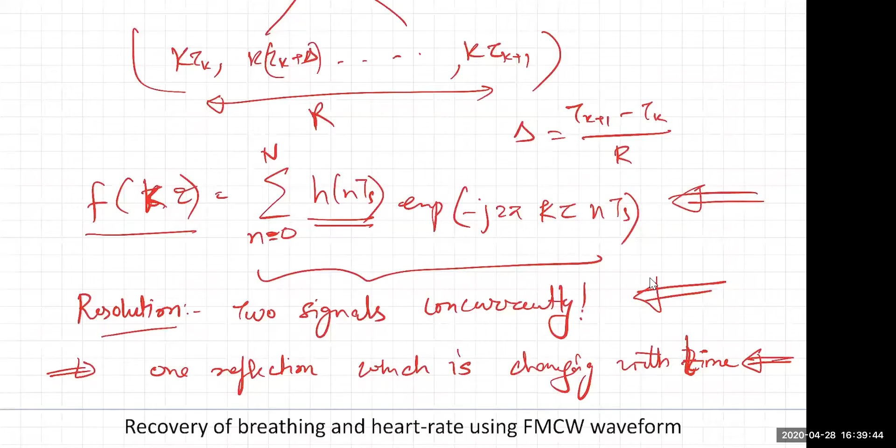I think this is a good example case where Ish will cover in his lab this week. Right, Renji, go ahead, you had a question?

So basically here, we are not directly doing FFT, right? Yes, we are not doing FFT directly - we are trying to first interpolate it and then do the FFT. Yes, we are doing DTFT, and you can call it interpolate, or you can call it however - there are many ways, right? You can call it super resolution.

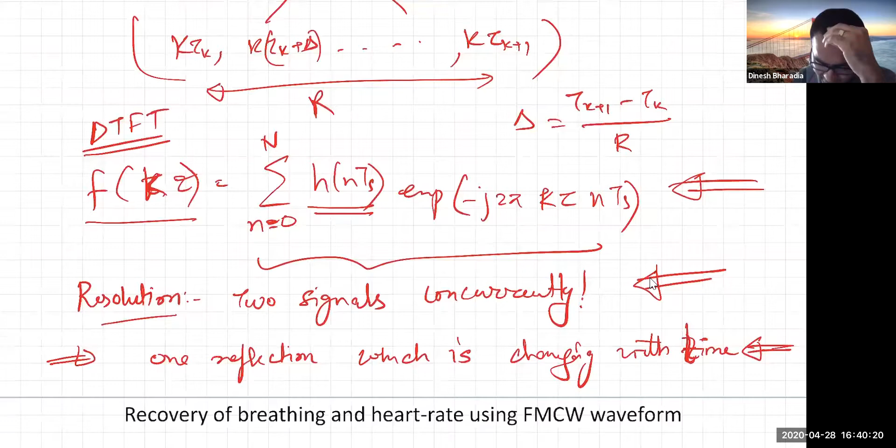Because I'm trying to identify where this peak is, right? By looking at these samples, I'm trying to identify the underlying observation - this is the underlying observation. It's also called super resolution. But I think for FMCW, you can view super resolution as the most simplest form like that.

Professor, what happens if we do take the Fourier transform of that - of the square waves, since it's drifting? You'll see the heart rate, you'll get the rate, you'll get accurate breathing rate. I see. Actually you won't get the breathing rate that way, but you can tell variability of frequency.

So if you're breathing, let's say at 12 breaths per minute and then your breathing fastened because you were running or something, and it went to 25 breaths per minute, you can make those differences out even with a square wave.

Right, but when it comes to really getting the more time dynamics, particular time dynamics - for example, for a condition called COPD, it's like an asthma related problem - I think there they try to measure flow volume. What is flow volume? It's how deep your breath was, how deep and shallow the breath was.

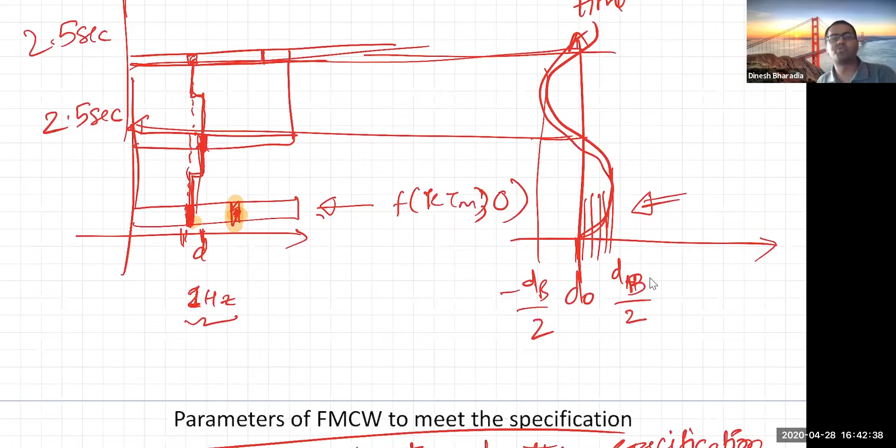Now, even after applying this kind of super resolution, the question is, can you still get heart rate with this? Heart rate is 1 millimeter movement, right? 1 millimeter is a lot.

So I think the best way to think about it is what would 1 millimeter change. If a bin size is, let's say, 7.5 centimeter, I need to split this by a factor of at least 100 to get to at least 0.75 millimeter, or close to 1 millimeter.

So I think you should try this in your lab. Maybe it might work - I'd be surprised if it works because of SNR limitation. In a noiseless case, sure, you will get it to 1 millimeter as well - noiseless case or noiseless world, this doesn't matter. But in the world of SNR, this will start to matter significantly.

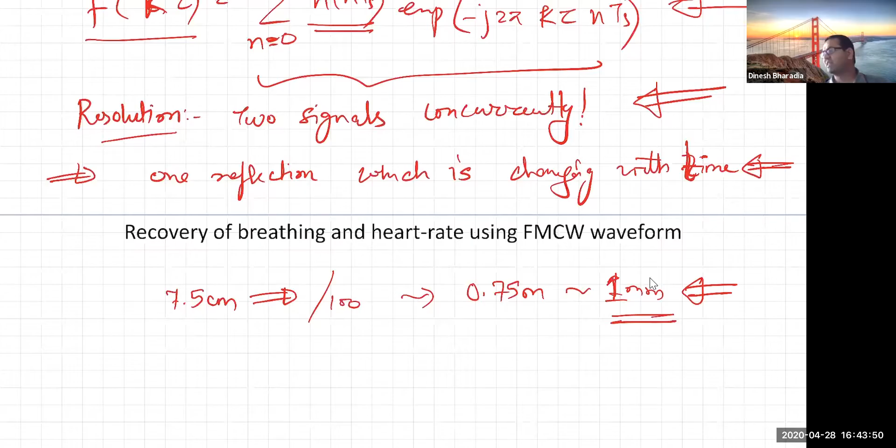Actually, I was hoping to make some interesting observation. So after doing this, Keshav, let's say if I can smoothly track the peak at which the movements are taking place - let me draw it.

So after doing this super resolution, what I can do is more fine-grained points, and because of that I will get your breathing nicely with smoother variations. The problem is the heart rate on top of this is like 1 mm variation, and because you have noise on your receiver, you cannot almost always accurately make sure that you get this. This goes back to how much averaging you need to do, and how much phase noise you have. But the idea really is we will go back to the term A tau.

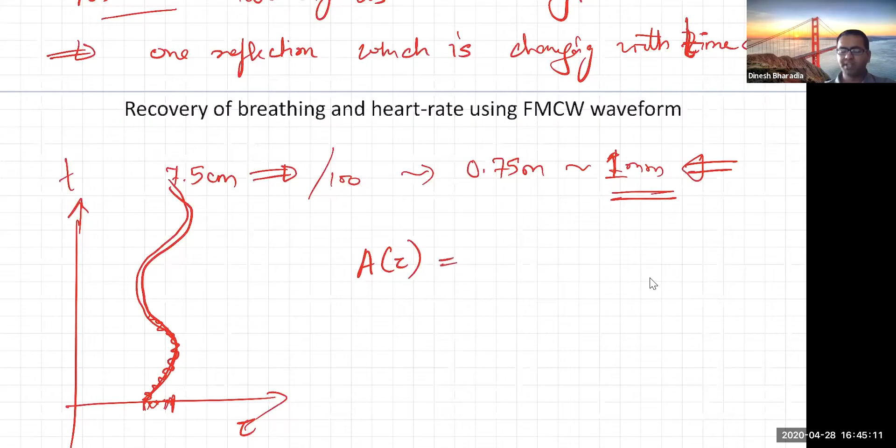Think of this as your x-axis as tau, and y-axis as time t of your breathing. So A tau - remember the term A tau? What is A tau? So far what we have been doing is just trying to measure this peak, where this peak lies, and based on that we are trying to identify the delay. But this peak also has some complex value - what is that complex value? It's your A tau. Can someone tell me what A tau is? Keshav?

A exponential of minus j 2 pi f naught tau.

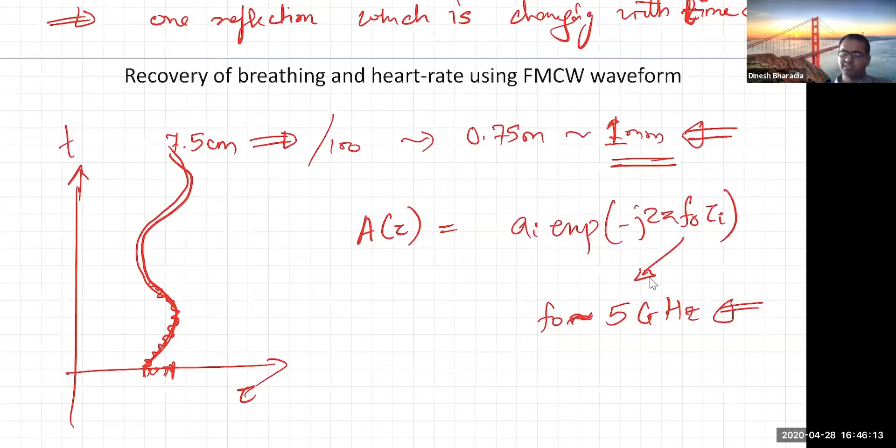Right, so what is the intuition, guys? Let's take an example - we have done this F naught analysis. What is your F naught? 5 gigahertz, okay. Now I have told you many times that for a good, reasonable receiver, measuring 6 degrees is totally fine - phase. So 5 gigahertz means that for 360 degrees, on 5 gigahertz, how much time should pass? How much should be tau?

I'm gonna pick on you, Keshav, again. 0.2 nanosecond, correct? In 0.2 nanosecond you will get 360-degree phase rotation at 5 gigahertz, correct? Right.

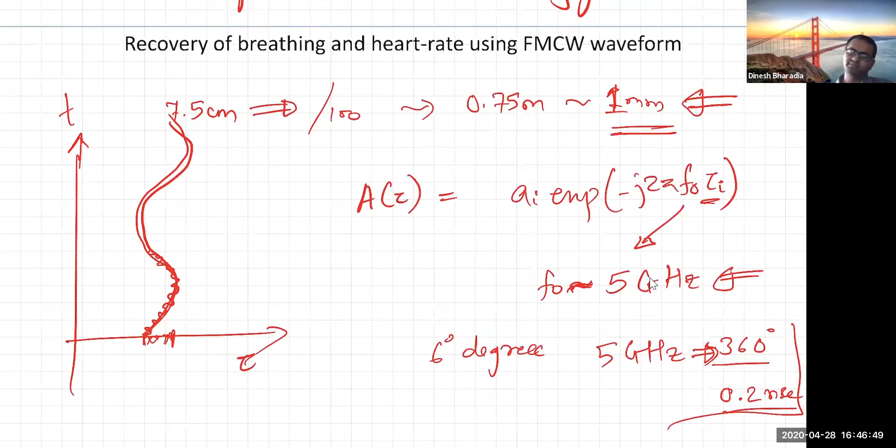Now if you were to get this 6 degree here accuracy - or you can say resolution for the receiver, but this is the resolution of receiver's phase measurement - how much will that get you to? 0.2 over 60, which is 0.02 divided by 6, or like we did this calculation - it was 0.00333, which is 3 into 10 power minus 12, picoseconds. Or 3 picoseconds, let's put it as 3 picoseconds.

Now what is 3 picoseconds? It's like 30 centimeter divided by 1000. 30 centimeter is for 1 nanosecond. So this essentially comes down to 0.03 millimeter actually. So your breathing and heart rate are at 1 millimeter - sorry, heart rate is at 1 millimeter, right?